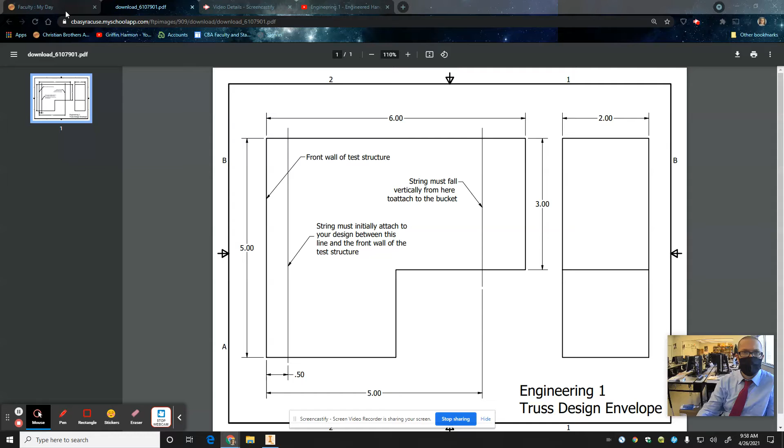Alright, another quick video here. Let's say you started by 3D modeling this block, right? That's the loading block. And then you want to kind of base your design around that.

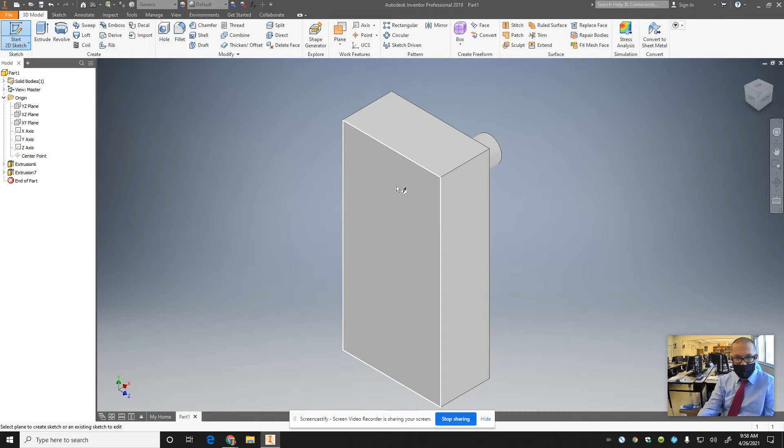Maybe what you do is you start a sketch on the back here, right? And then you project geometry, you get that outline. You can actually do an offset, right? Because I'm going to make like a little pocket to hold this. I'm going to offset this by 0.01. Doesn't seem like much, but it'll be just enough to be a pretty decent fit around it.

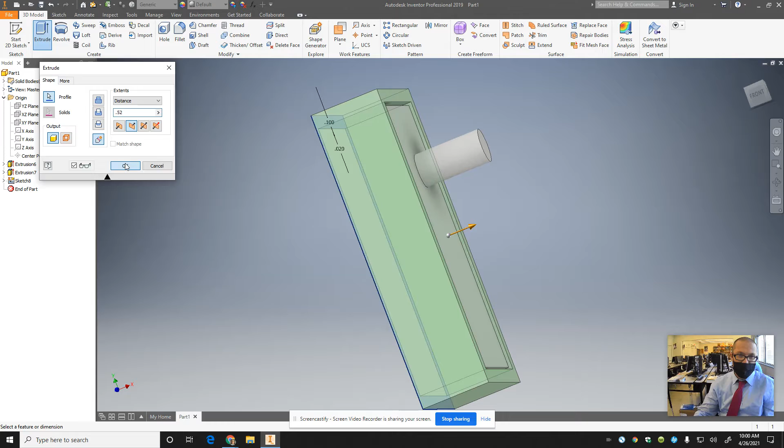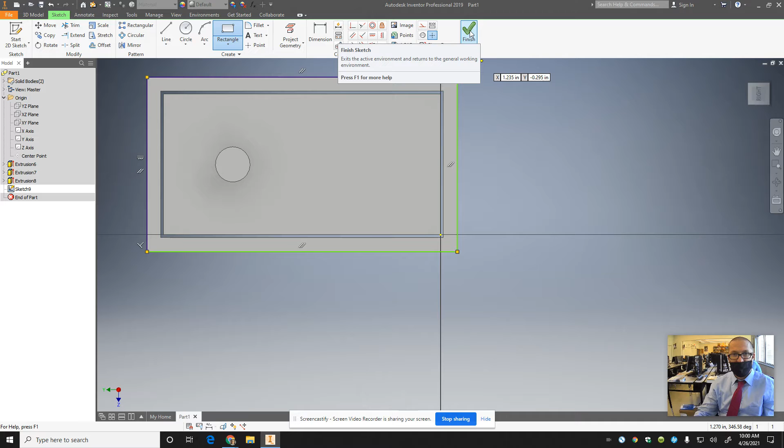If you want to be a little more aggressive, you could make it 0.02. It'll probably fit without any issues, you know, hit finish sketch. You got to leave a little space around it. Oh, let me go back into that sketch actually. So I'm going to do another offset here. I'm going to offset this 0.1, you know, to go around this block, finish sketch.

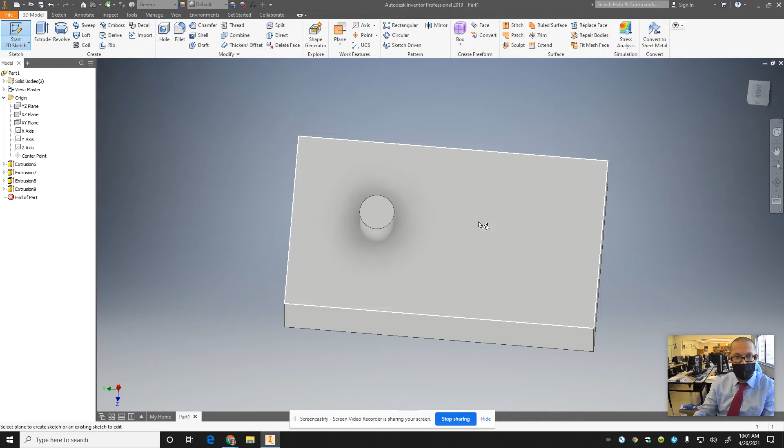Now I'm going to extrude this little picture frame basically, right? I'm going to make this a new solid here. New solid. This is the key. Change the direction. I want it to come up, but I want it to go a little bit beyond the loading block again to leave a little more space. So I'll make it 0.52. Alright. Hit OK. Alright, so I'm making a little pocket to go around that block.

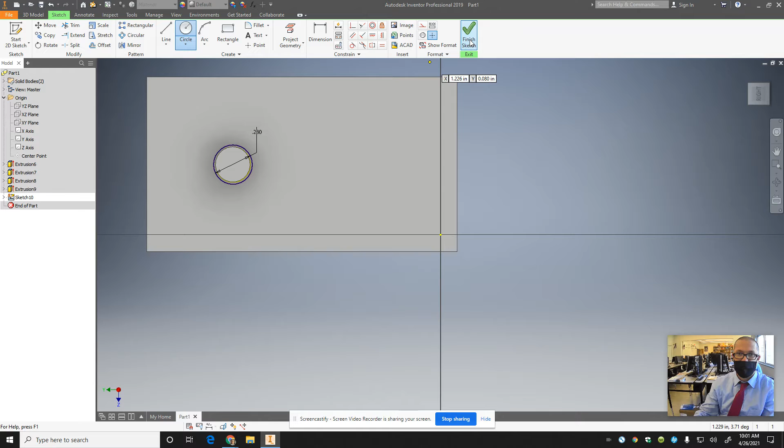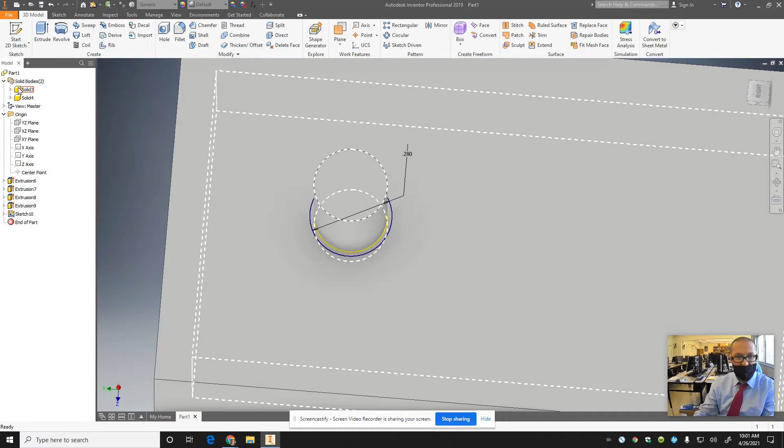Now, I'll start a sketch here. Project geometry. I get this outside border in here is what I really want. So I'm just going to get that in there, and then I'll be able to draw a rectangle. Alright. Finish sketch. I'm going to extrude that one. Since I started it on this solid here, it's going to go there. I'm going to make this 0.1. Okay?

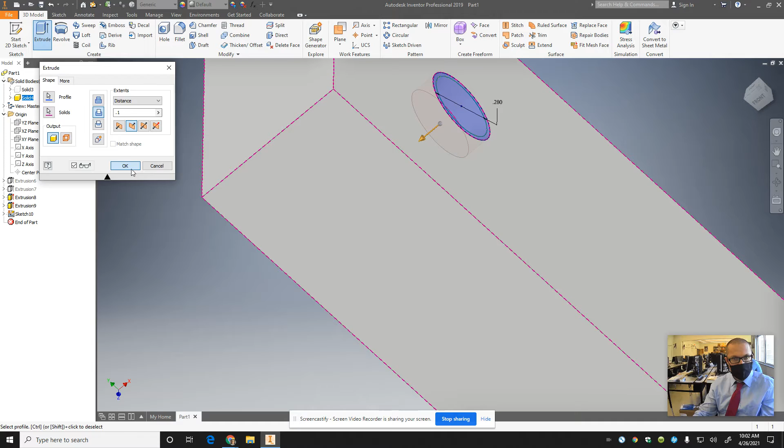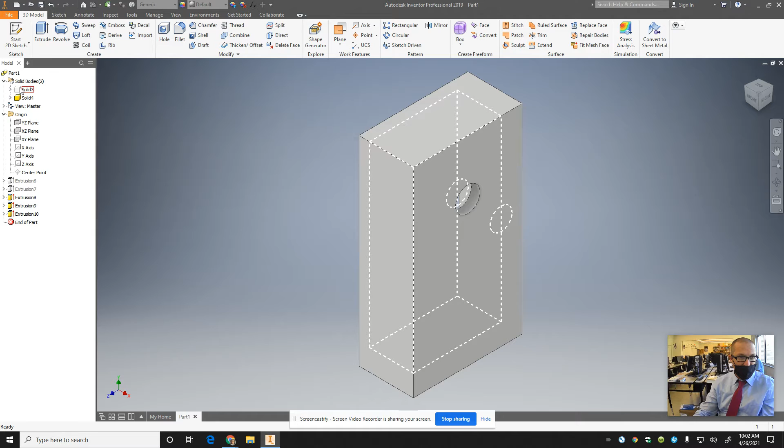Now, I got to put a hole in this to fit around the screw. So I'll start a 2D sketch on this work plane. I'm going to project geometry here of that thing in here. I'm going to put a circle and make it 0.27. No, I'll go 0.28 just to make sure it's going to be big enough to fit over the screw. Okay, finish sketch. Extrude.

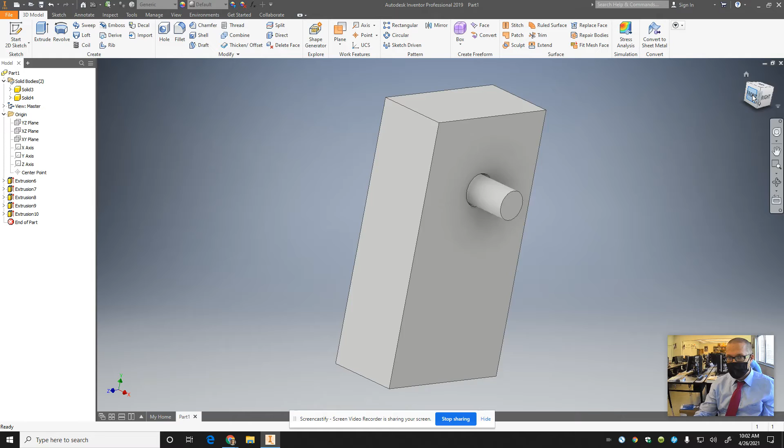Now, it's going to be a cut extrusion. You got to select the solid you want to take it out from. So check this out. That solid body, that first one I made, I'm going to right click on it and turn off its visibility. So now the loading block has disappeared. I used it to make this little pocket, but now it's gone. So I'm going to do that extrusion again. I get both of those and make it a cut. Hit OK. So now I have that little pocket.

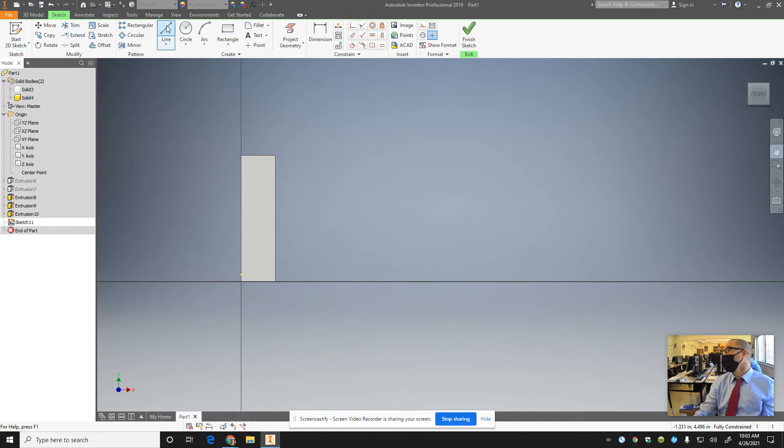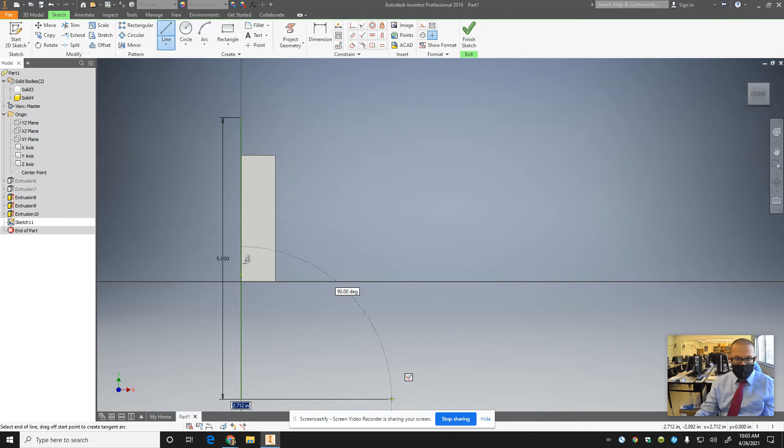The key here is I have two solid bodies. I'm going to base all my modeling now off of this solid body. They're 3 and 4 because I deleted some stuff; it would be 1 and 2 if you started from scratch. I can make the loading block visible again. You can see it's now in there, a little bit of space all around it. So this will fit nicely. But really I don't need it anymore. Screw nut's going to go on there. Just got to keep in mind as I design how it's going to fit in here.

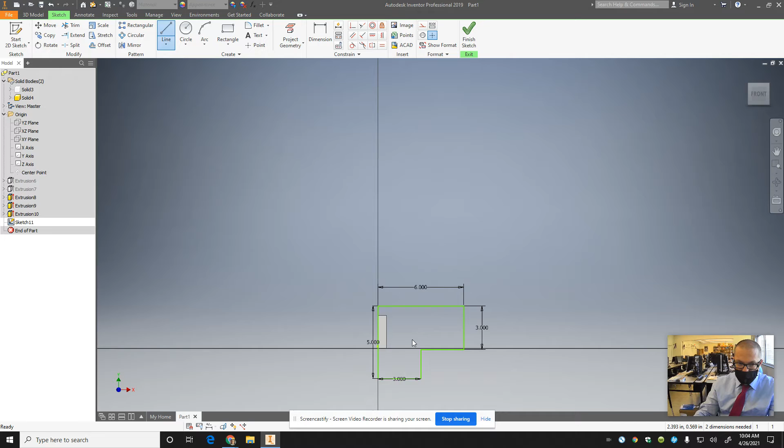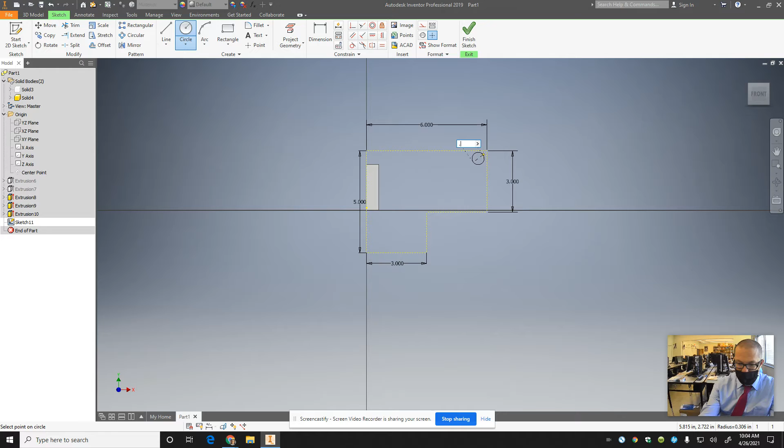Now you can start designing your sign. I'm going to make this solid body not visible. You can start making your sign off of this. And the main thing here now, I could draw the design envelope around this, like we did in the previous video. Or I could just draw a couple other things and just make sure at the end I'm going to be good. But it's probably safest to draw the whole design envelope here. So I'll do that.

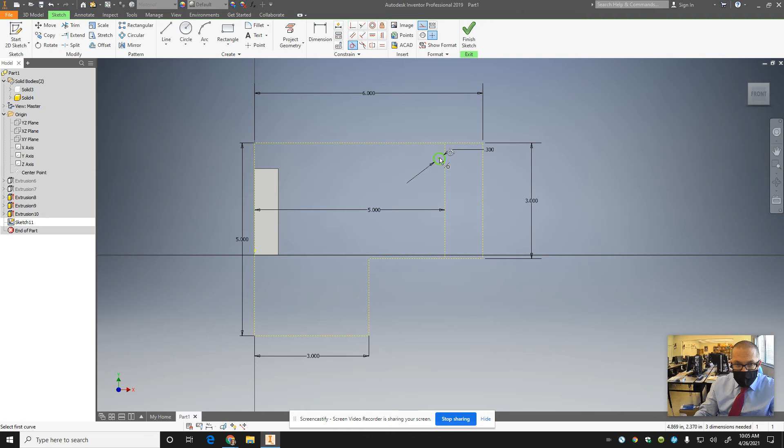5.0. 3.0. Oops, I guess that just did 30. Top is 6.0. 3.0. 3.0. Okay. Highlight that, make construction. Alright, so now I can think about where I want this to go. I can start doing my other stuff here. So I'll do like I did before.

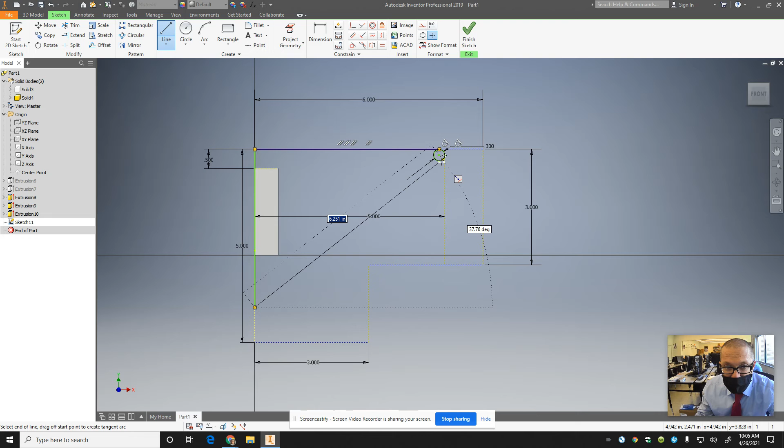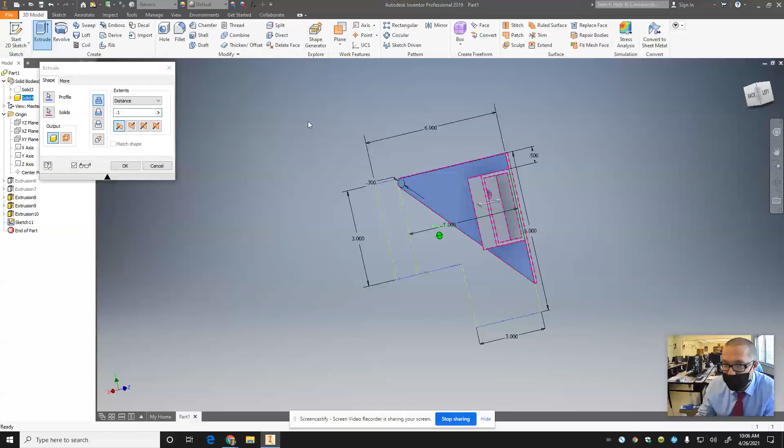I'll make a circle up here. Oh, I gotta put the line. Put this line in here, dimension that to the front. Oh, I snapped that line. That was not smart. You snap your line, you can't dimension it properly. Alright, so this over here. I should probably dimension from here to here. Make this a fairly even number. 25.

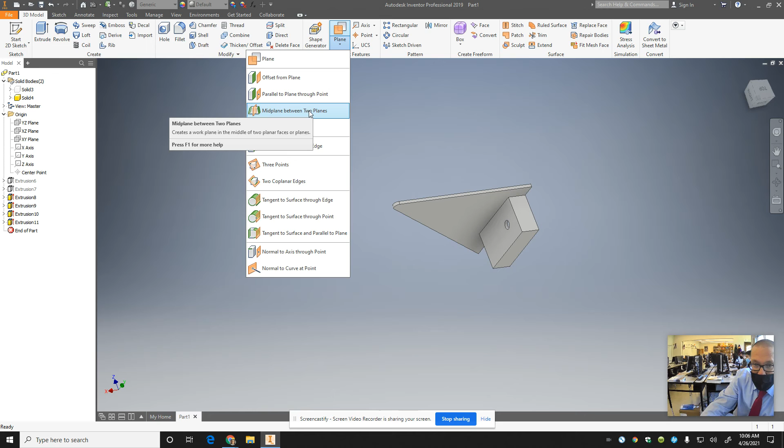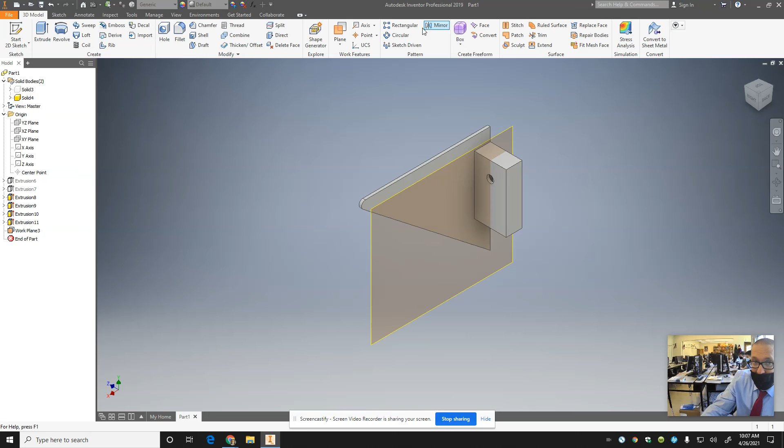I just want to quick draw that same shape. I'm just going to very roughly, crudely do this. I don't want it to be a construction line though. I don't know how far down I want to go. I'll plan that out later on. Trim this out. Alright, finish sketch.

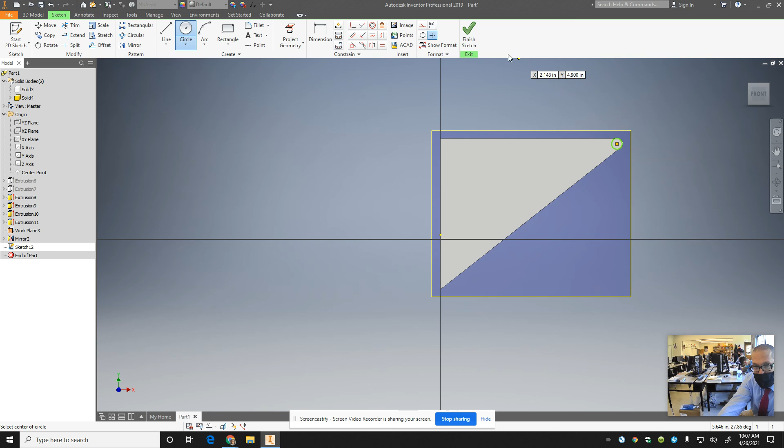Let's extrude this. Now, which way do we want to go? That's going to be up to you. You can go in, go out. Say I want to go out. There we go. That's going to be nicely connected to that pocket now. A little bit thicker there, but that might be okay. Alright, so I want to mirror this, right?

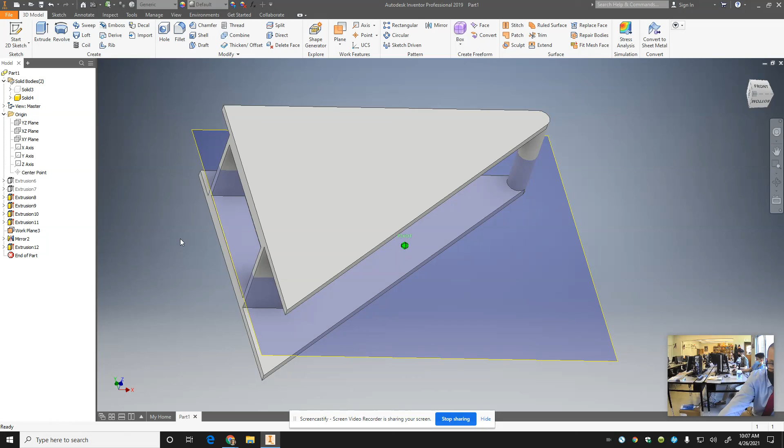So you go plane, mid-plane between two planes. Then you click the sides, if you can get them. Okay, we'll have to do it on the inside. Plane, mid-plane between two planes. So between that plane and that plane. So now I can mirror that across this work plane. You're good to go. You might do a little more design work before you mirror it, but that's good.

Now, sending pegs across. Those pegs you're going to design, you start a sketch on one side. I'll project this arc in here. I showed this in the other video. Draw a circle. Then you're just going to extrude that across. You can change the distance, make sure it's a join, and you can send it to next. So it'll go all the way across. And there it is.

And then you can do more. You can cut stuff out from the side. Starting to get the basics here. I may need somewhere to tie the string on. It's going to have to be back somewhere. It's going to be fun. It's going to be interesting. All right.